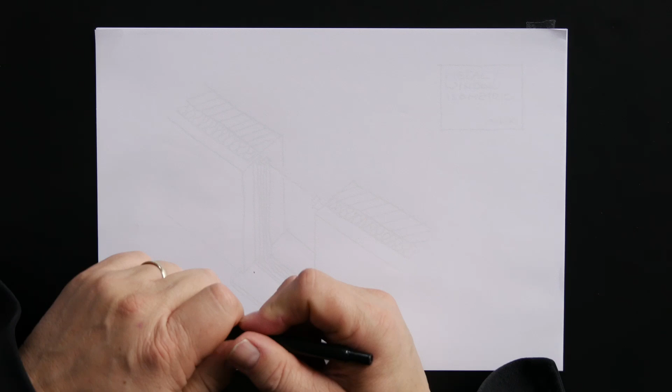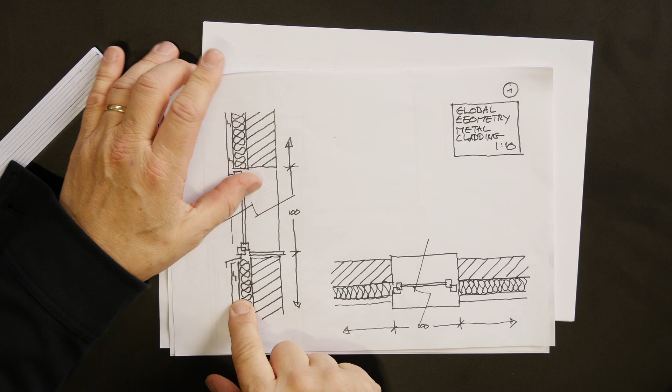Dr. Knaack. Dr. Bilow, so we did the global geometry, we did the vertical window sill, vertical detail. We need to do a horizontal one, so this one. And this is how to put it actually on the wall. So actually flip this. Yeah. I'd like to have it this way because I'd like to have outside at the bottom. Yeah. So let's say how we start with the wall.

I start with the wall. You want me to start with a wall. You're a bricklayer. You want me to start with the wall. Because I'm a bricklayer, but I did my PhD in glass. I would have started with the glass.

To put a window in a window hole, you start with a hole. Or in this case, the wall that defines the hole. Did I somehow give it a dimension which was kind of okay? Yeah, that was kind of okay. So we add another layer for the insulation somewhere here, and the outer metal cladding comes somewhere, let's say, here. Around the corner. And now I have to add the aluminium system. Let's put the glass first. Yep. Glass.

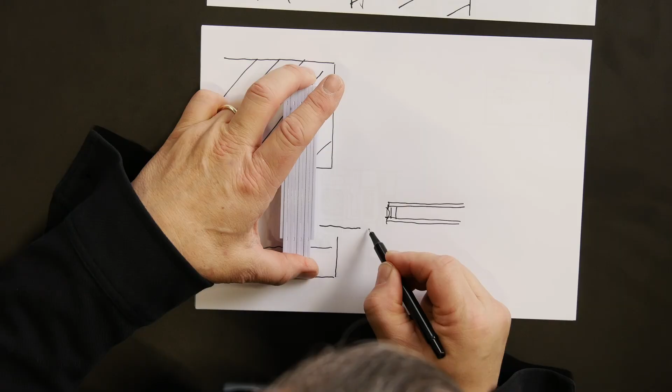Insulation. Glass. Or the IGU, the insulating glass unit, precisely. The whole thing was 10 centimeter, which I would say goes here. Yeah, a sealing to enclose the glass unit. These pieces. We have the window. First one, then the ring itself. This one. Usually when you draw this, later on in the computer you just put a block as a stamp, sort of. Makes it way more easy. I love to draw this in. No, it's also clear. So this is the basic.

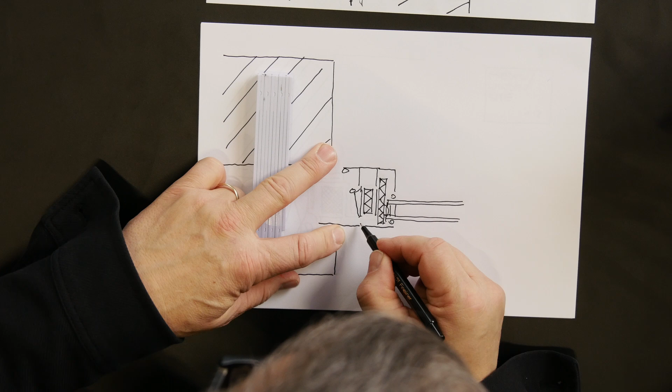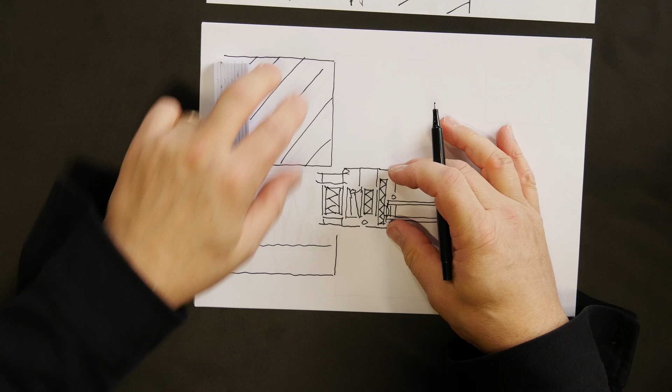We would also always, in the office, start making hand drawings to understand the position and the general approach. And then later you can just detail all the details on the computer, which is copy and paste, most likely. And then you adjust to the various detailed geometries. Okay, this is the profile as we see it here. Yep. And now this whole thing needs to be fixed to the solid wall. Yeah. So in general, you would add a bracket, either steel or aluminium, something like that.

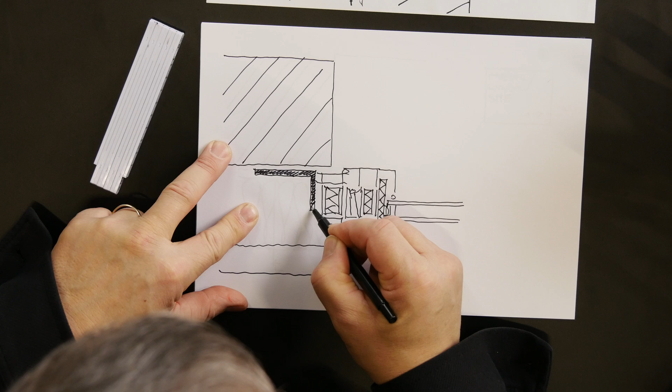I'm adding a bracket. This is often where you have to discuss with the contractor, or if you do it in an earlier phase, just leave it to the contractor. They will have to make sure that this is also working according to their set of tools. And then I fix the aluminium system into the bracket. So I put a screw somewhere through the aluminium system into the bracket, and then it's positioned.

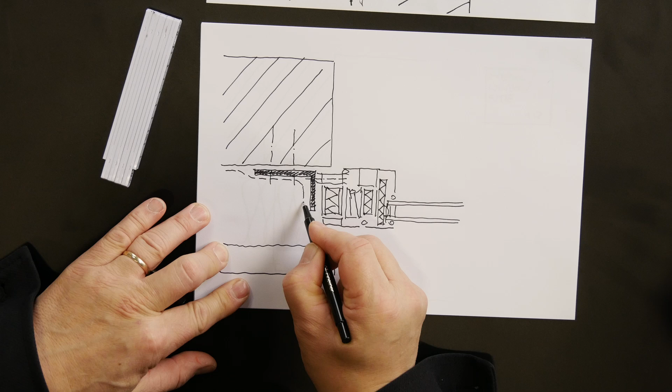All right, then there comes insulation, but before, this needs to be airtight. You have to put a barrier around it with a film. You have to imagine that this is a window frame around, and then you have this rubbery film, and that has to be wrapped around with sealant. This is a pointy little thing. Often they put a little bit of insulation here first in order to make sure that you're not pushing into the sharp ends of the screws, and then seal it all nicely. And especially here, make sure that it doesn't overlap and become visible.

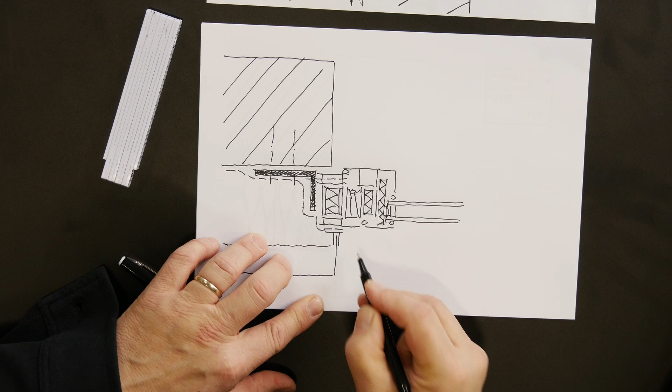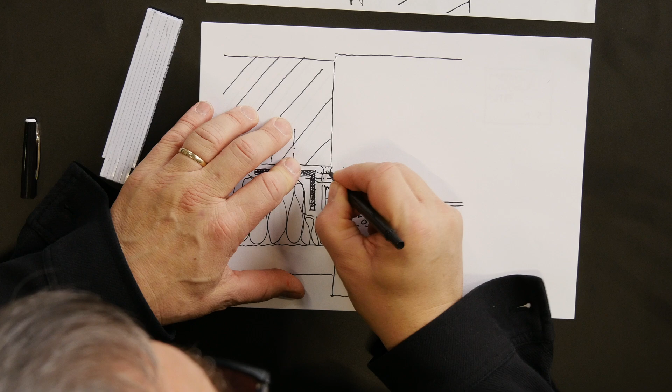Which means I need to somehow fix it, which I do with an additional profile. Now that's a nice one because it's telescopic, so also thermal expansions and tolerances will be adapted here. Make sure you ask about this especially, because architects often don't like a visible connection. So if you put a screw here, for instance, then this may look nasty. Here I'm going to seal it. Yeah. Right. That's the next.

It's a metal window, aluminium, horizontal section. This becomes then the standard window detail. 1, 2, 2, and this is detail number 8. Perfect.